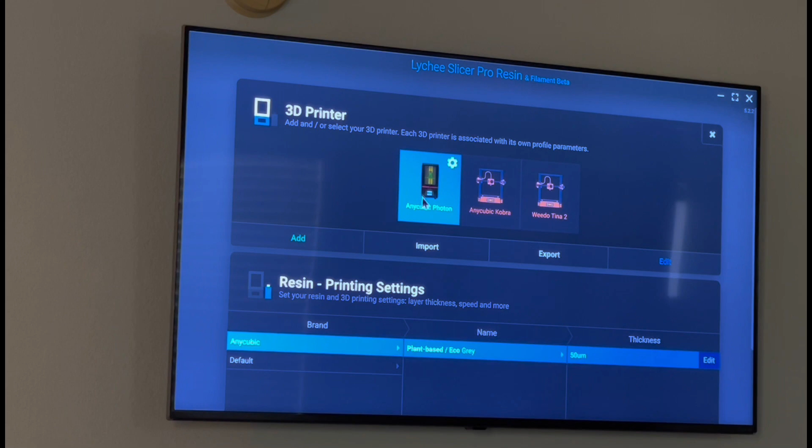And then so I'll save them, or I did save them. And then I'm gonna go to my slicer, which I use a Lychee Slicer Pro, which I have my resin printer here, my Anycubic Kobra, and then George's printer. I was trying to mess around with his settings, but anyway.

So I'll select my printer, go over here to add file, go to resin. I have them in wheels because I have a bunch of different sets of wheels. And then let's see, front dish.

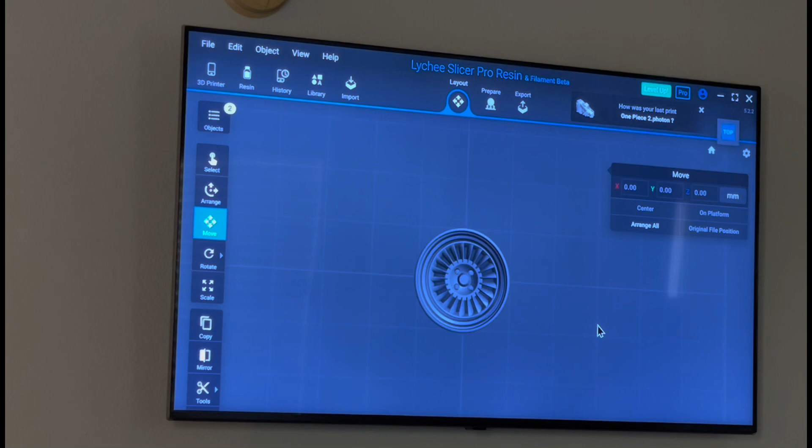So it pops up. These are a two-piece design. So here's the hoop, and I can go over here, import the spokes. See, it actually went ahead and just put it inside for me, which would be hard to do that for every single one.

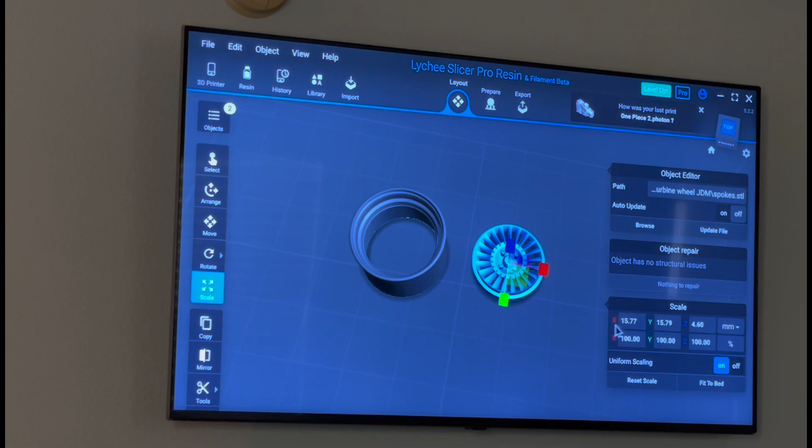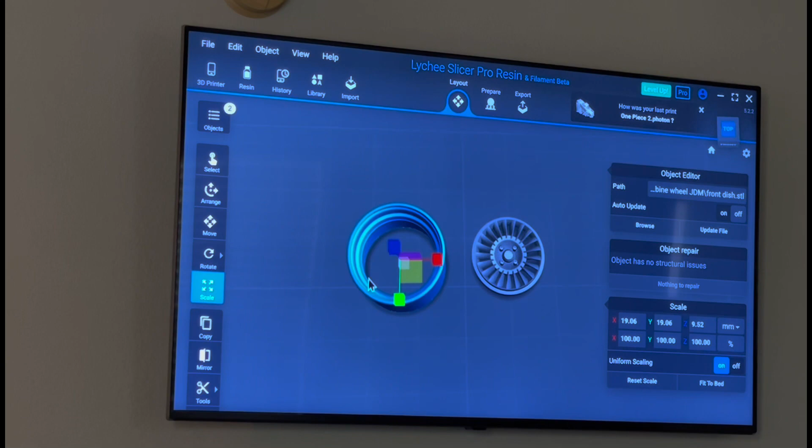But anyway, so two-piece design, and I can move them, obviously. And then what I need to do is scale these, because right now they're actually almost pretty good. No, they're not. Okay, so these are 19.06 millimeters, and I need to go down to like a 15.

I think it's like a 15.8 or something like that on there. So I need to scale these two proportionally to each other. So what I'll do is I'm going to highlight uniform scaling so it does everything.

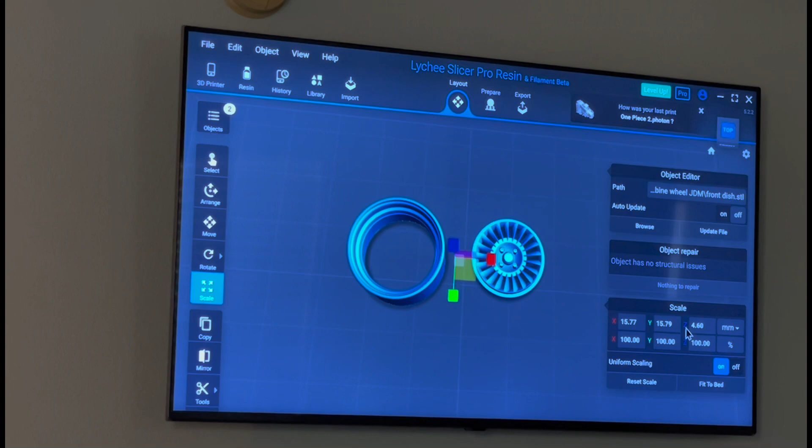And I need to find out what my wheels are really quickly here. I'll be right back. All right, so it's going to be 16 millimeters by 8 is what I need.

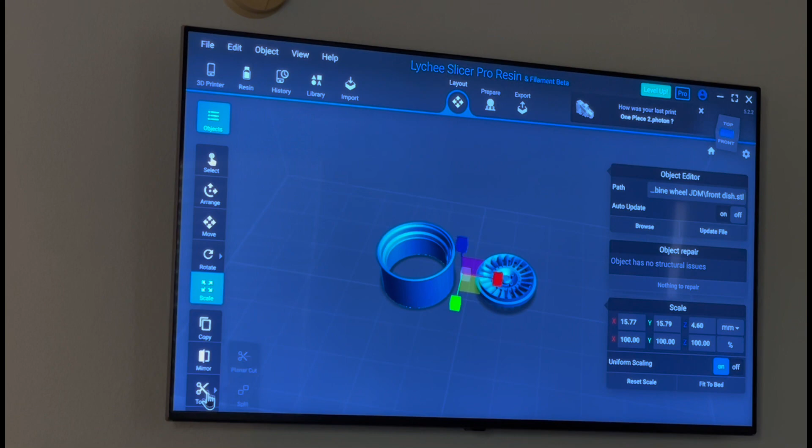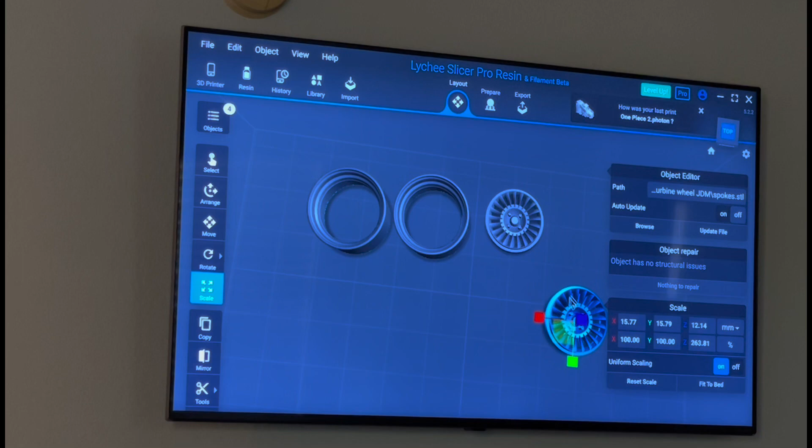So what do I have? A front dish. So what I need to do here, I want to copy, duplicate selection. I don't need that right now. So these are fronts. Oops, I just scaled that and I didn't mean to. I need to hit move.

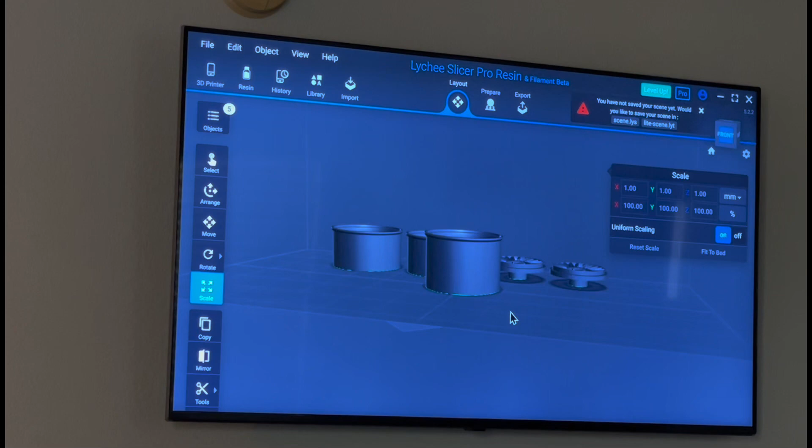All right, so anyway, so what I need to do now is I need to add the rear dish. You can see it's actually wider, but I can't, they're all going to have to be the same size. Which they almost look like this dish, and this dish is the same, how deep they're going to be.

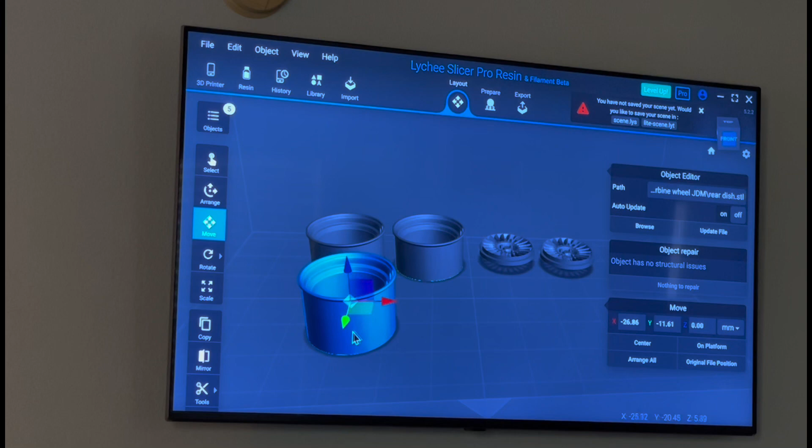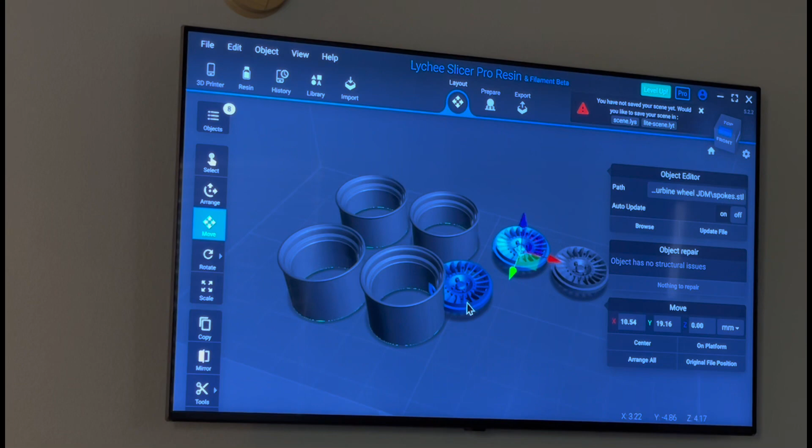But anyway, so what I need to do is I need to take this one and move it because I need to copy it and make another one. So now I have 2 hoops. Actually, I need to go ahead and copy this. I need 2. So there we go, I got my 4 hoops and my 4 spokes.

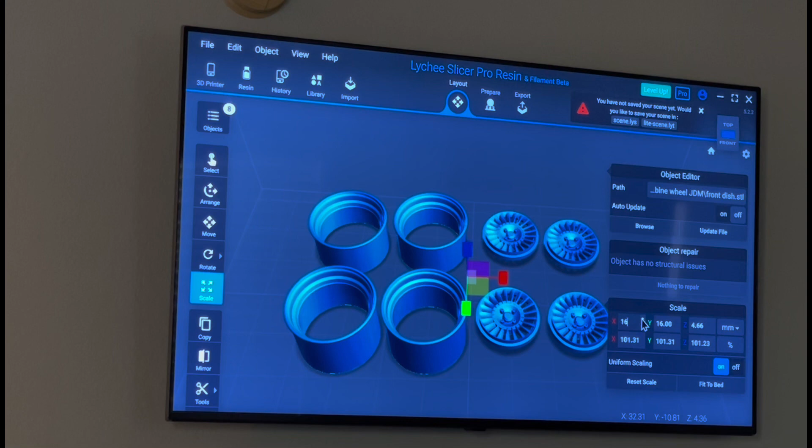And what I want to do is I'm going to highlight all. Scale. And then I need everything to be 16. Oops, uniform scaling. Oh, I see what it's doing. Those are different, so it needs to be 16 as far as the hoop size.

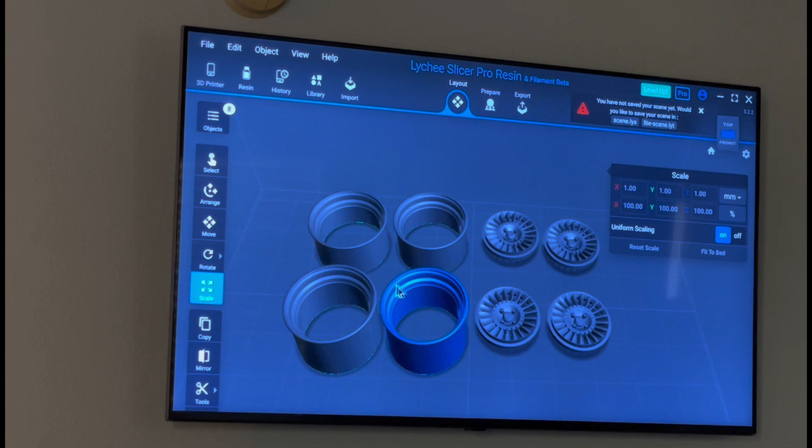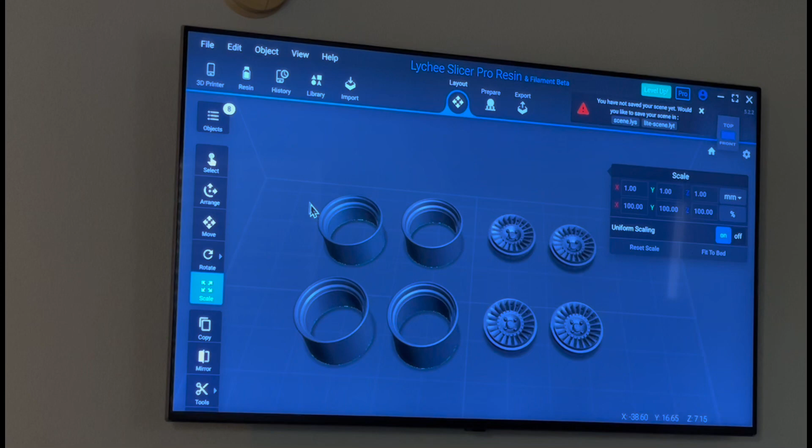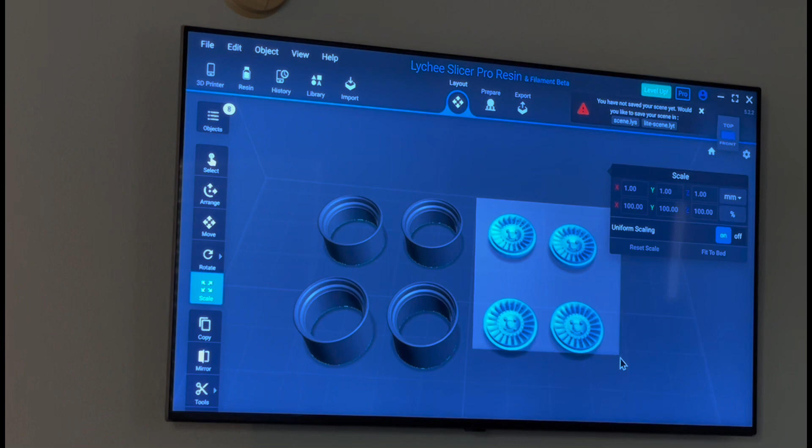And then I need to take the depth, or would be the width of the wheel, down. All right, so I figured it out. I needed these hoops to be 16 millimeter, so by scaling these down, these needed to go down with it. But every time I highlighted both, it only gave me the options for these. So what I did was I found the percentage to change this hoop to 16 millimeters, which was 83.95%. So then I come over here and I changed the percentage to 83.95%, which scaled these to match these.

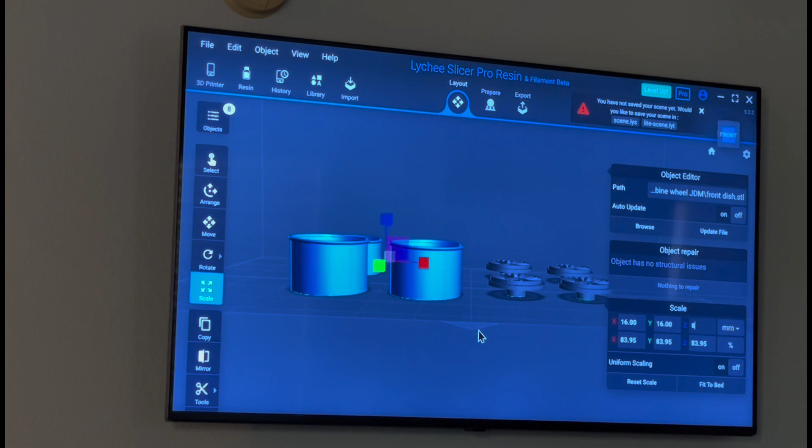So the only thing that I have left to do is I need to change the width. So what I'll do with that is I'll turn off the uniform scaling because it won't matter at this point. And so my Z-axis here, which is the blue up and down, I need to change that to the 8 millimeters. Boom. Which it only made these 8 millimeters. See, it doesn't do both. You would think it would change both, but of course it doesn't. 8 millimeters, okay, there we go.

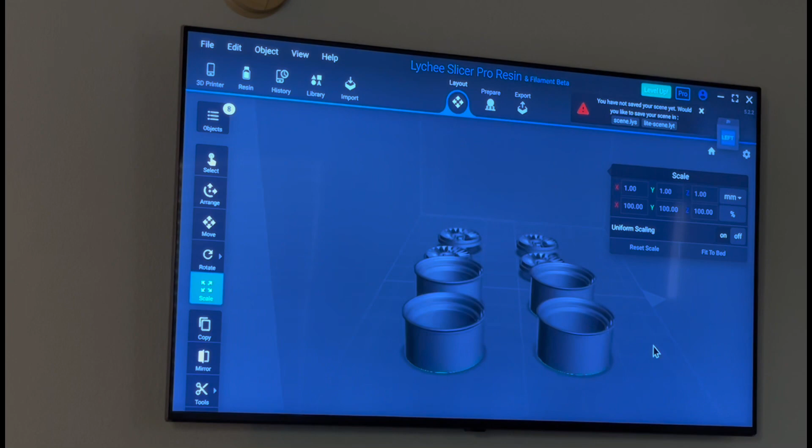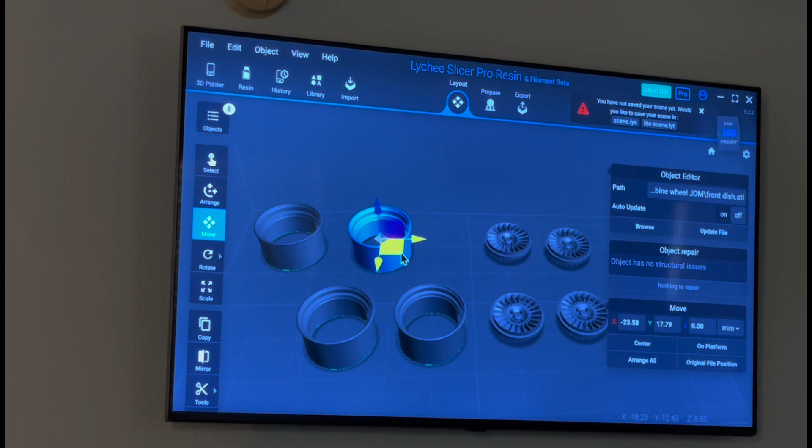I'm kind of wondering if these hoops aren't the same as far as where the spokes fit inside. But anyway, there's that. So what I'm going to do next is I need to arrange this stuff on my build plate. So this is my build plate here, simulating my 3D printer. And I'm going to move this stuff over in a spot, I'll need a little bit of room, because there's going to be supports that get added.

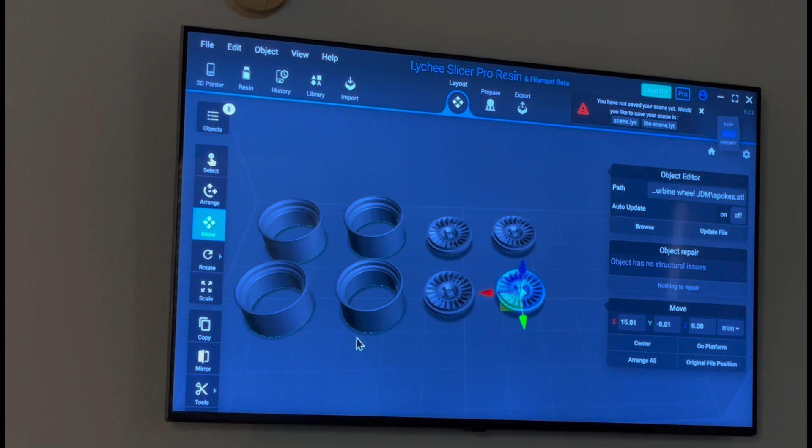So in order for these to print right, or print good, with the most detail and be smooth, I need to rotate these and put these on a 30-degree angle. So we got 36, I'll go over here and click down to 30. And the reason why I angle them this way instead of maybe putting this side down is so when you

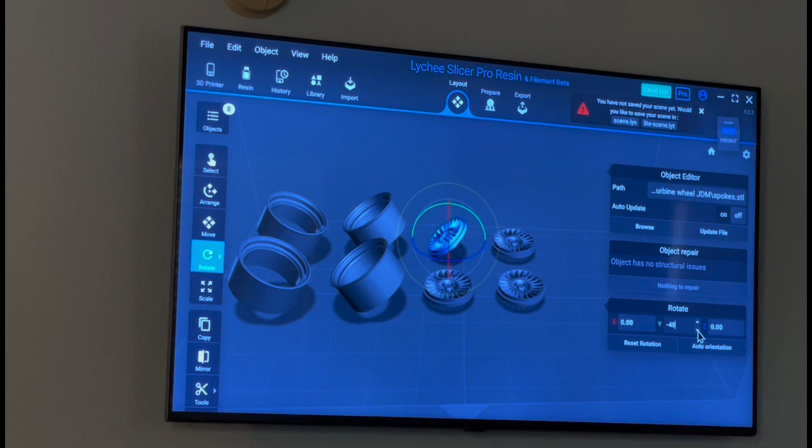print supports, which I'll show you in a second, the supports leave spots, which you'll sand it down and whatnot, but you don't want to have to sand down the part that has all the detail, because you might sand away detail.

So there we go, 30 degrees. Oops, we've done this better. And it doesn't matter which way. There we go. Oh shit, I just reset that. Hit the reset.

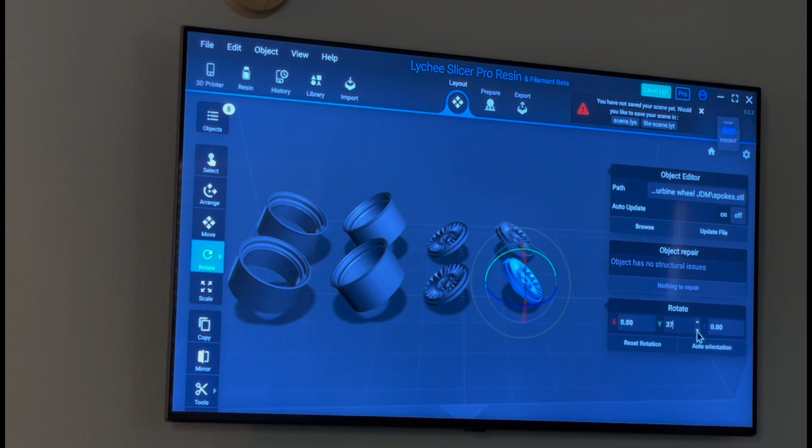Boom, there we go. So now we have everything set at an angle. And then what we're going to do is come over here to prepare.

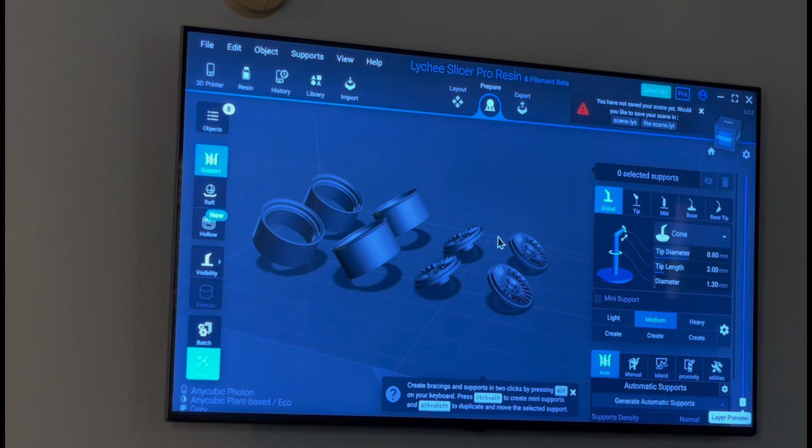I'm going to use medium supports because this stuff's not heavy. It's not like if I was doing a body, I would want heavy supports, especially at the bottom where it's printing, where everything's going to rest on. But just for these little wheels, medium supports. I could probably get away with light, but I don't want to have to worry about cleaning stuff up.

So anyway, I'm going to come over here and highlight, and I'm going to hit generate supports. It's going to do its deal.

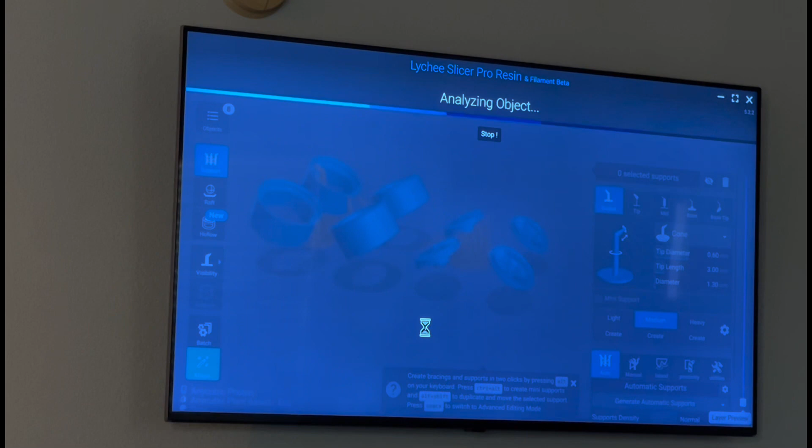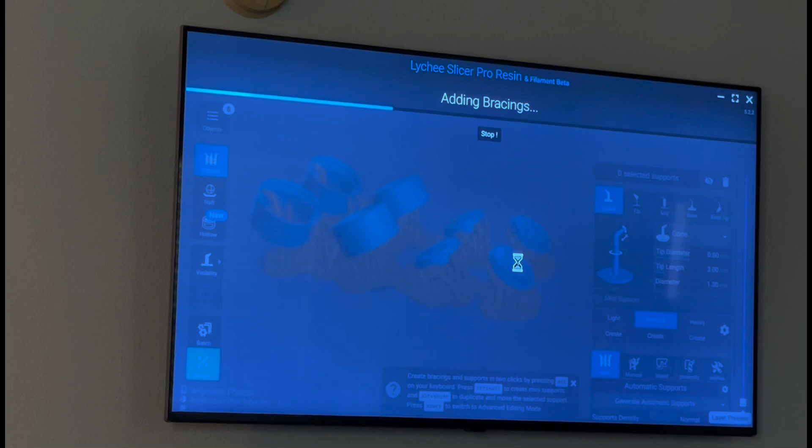Adding all that stuff. I don't know if you can see it popping up. It says 128 supports were added, 6 supports were not placed due to not finding a place to go, which is not a big deal. 32 island supports added, 33 supports optimized, 148 braces added total.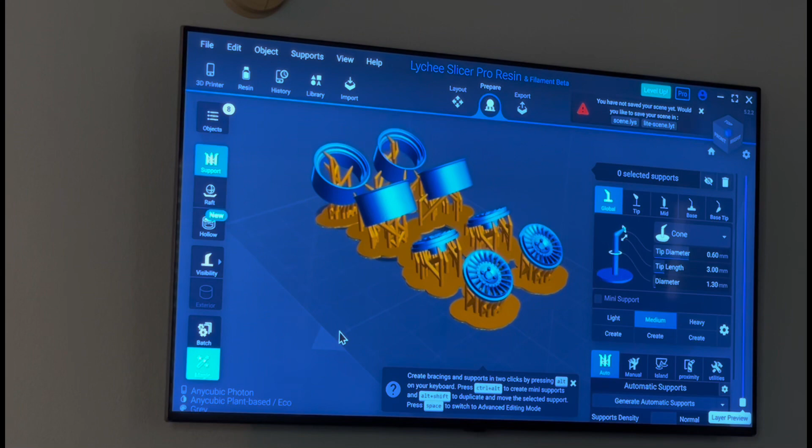So there you can see the supports. The rafts is what you see here, these round deals for the supports to connect to. So that is that.

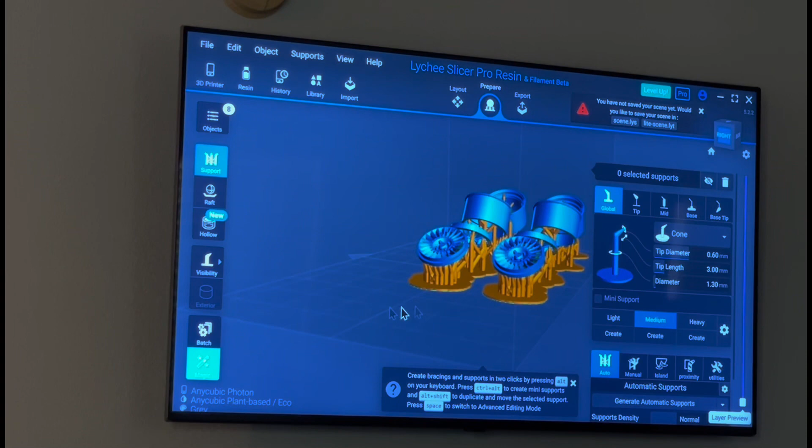Looks pretty good. There's some stuff I really don't care for, but I understand why it's there. Like these supports here, I don't really like them, but I'm not sure if I really have to have them.

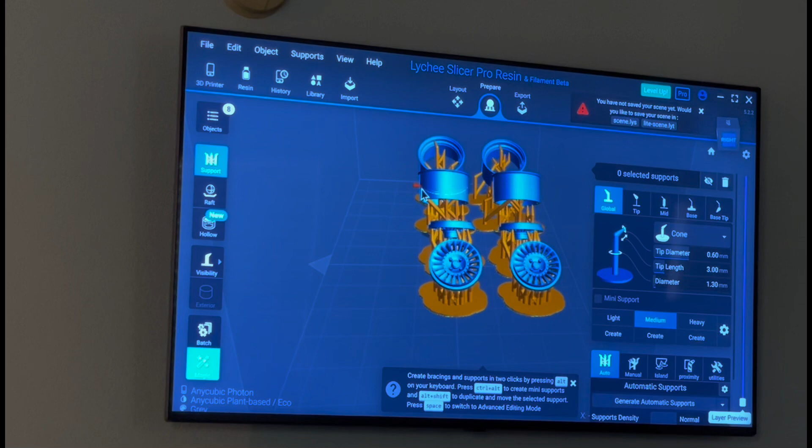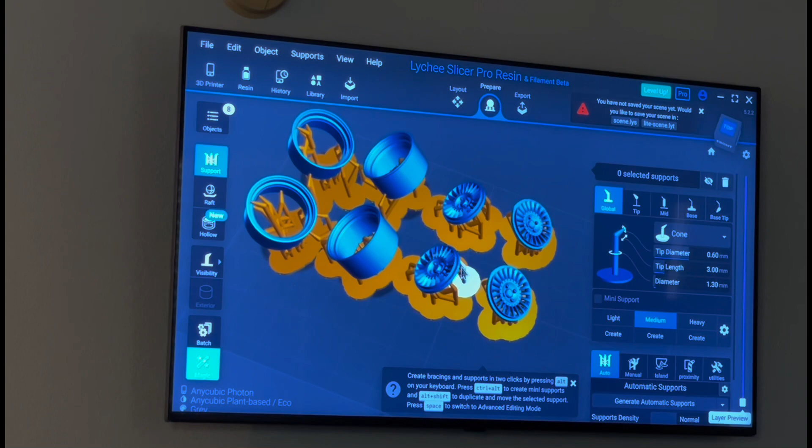But better safe than sorry, because cleaning up resin and it being stuck to your FEP, your clear film that's in there, cleaning up just sucks. When everything works right, it's good. So I know that this right here is going to print just fine.

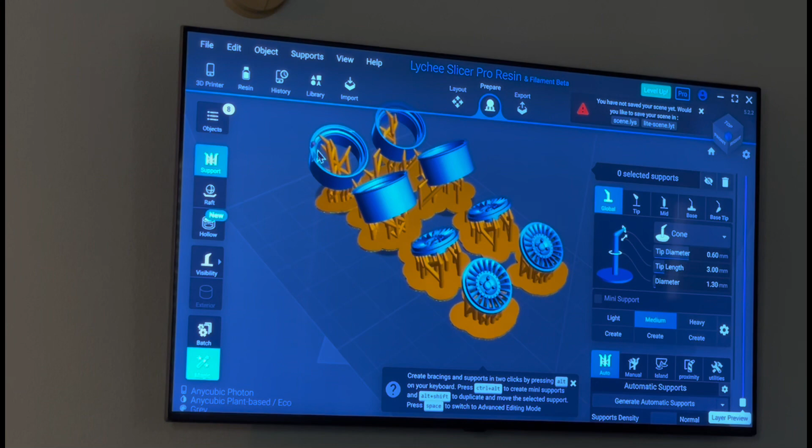So it's just a little extra cleanup when it's in the spot that you're going to see. You see like these, it's printed on the back side. And the supports here, this is where you want most of the supports, on the back side, because you're not going to see the back side. So you clean it up real good and everything's fine.

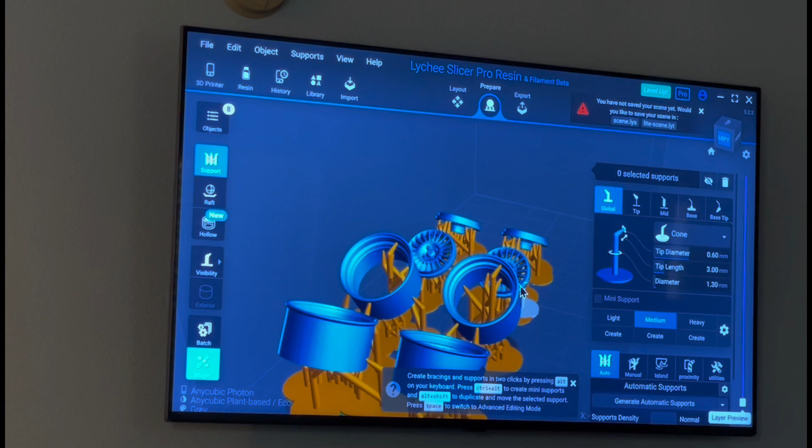But if you were to do it right here on this face, have supports, then that's going to be a lot of cleanup to make it look like it's supposed to. Perfect. And so it's just a pain in the butt. These few little spots won't be a big deal, but to have all these supports on the face, it sucks.

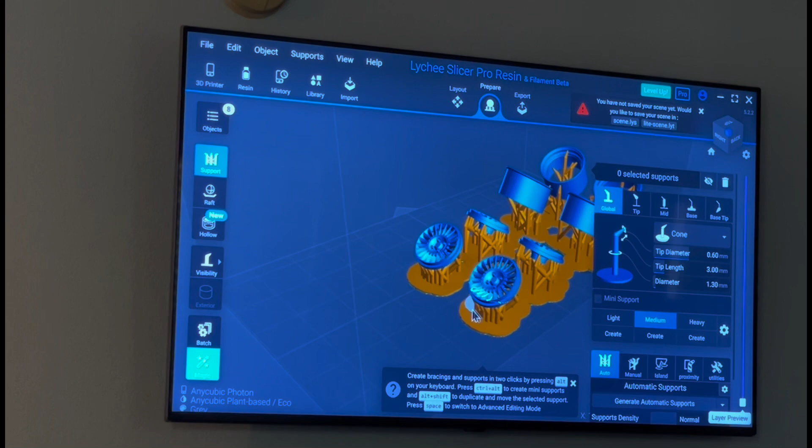So anyway, I'm going to go ahead. What I'm going to do, I want to see how it turns out. I want to print these in the same diameter as these, so I want these to be 16 millimeter. And I want to see how they look just being inserted in the H&R wheels without having to have these hoops, because then I can place these wherever I want and drop a couple drops of glue and I wouldn't have to worry about these hoops.

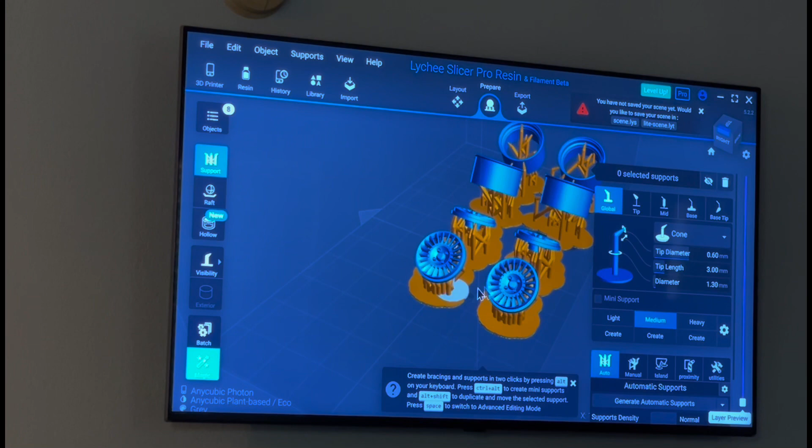So I'm going to go ahead and do 4 more of these at 16 millimeters. So I have all my wheels extra set.

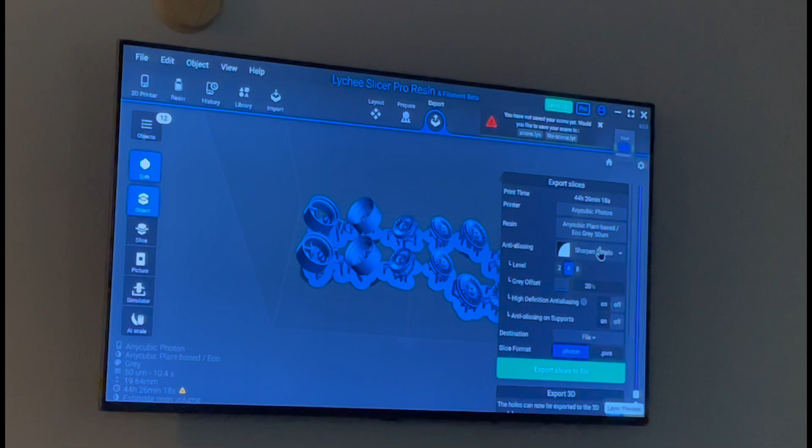And then I'm going to go to export, and for the anti-aliasing I'm going to do sharpen details. I want to put my level to 4. And then I'm going to export files and save it to my USB drive to go to my printer. And then we will go down and I'll show you the printer starting.

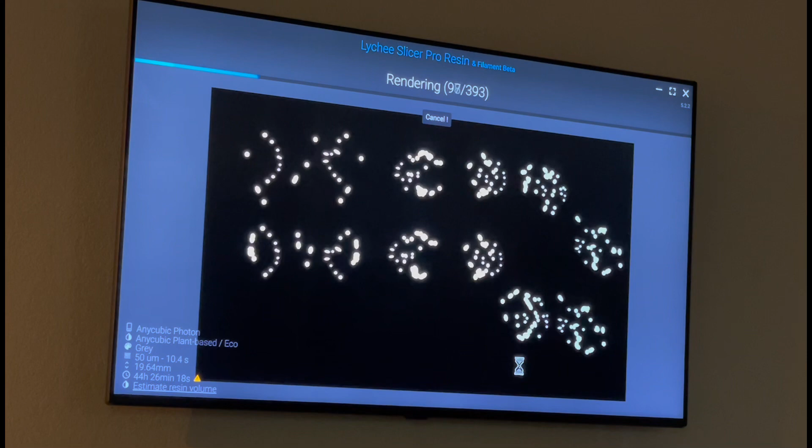Now right here is actually going to show how it's actually printing. It's going to go through all those layers just like that.

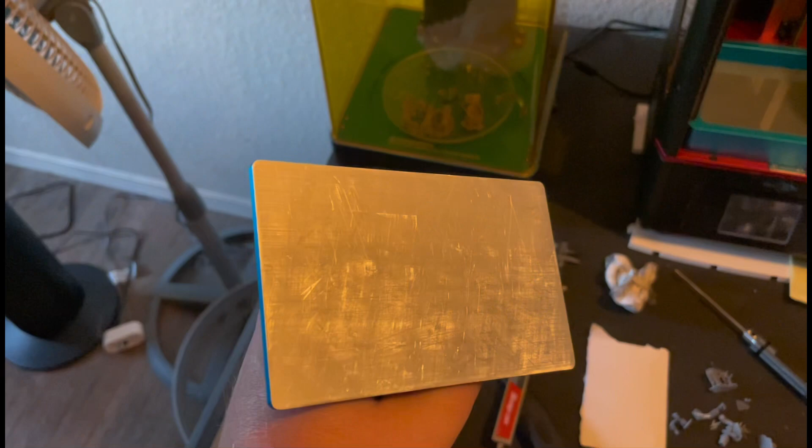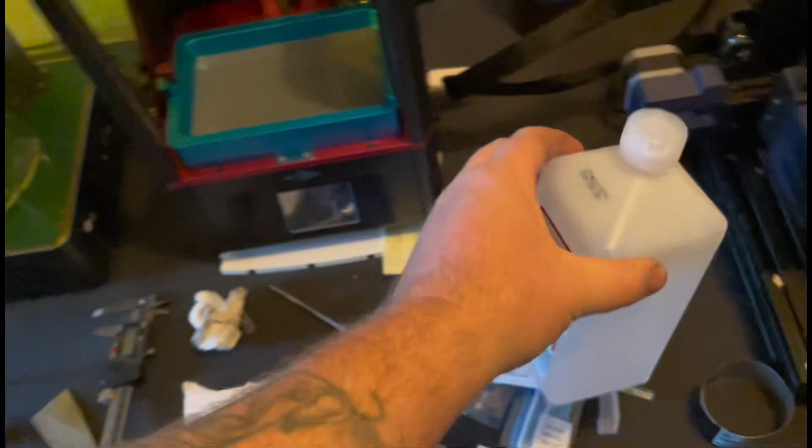So here's my build plate. I just wiped it off with some alcohol. This is 91%. Used a microfiber cloth. You can see where it's kind of scratched from trying to get some of the prints and stuff off, which doesn't affect anything. And it's got scuffs and stuff on it because I've taken sandpaper to it to make sure stuff will stick. It's all normal stuff.

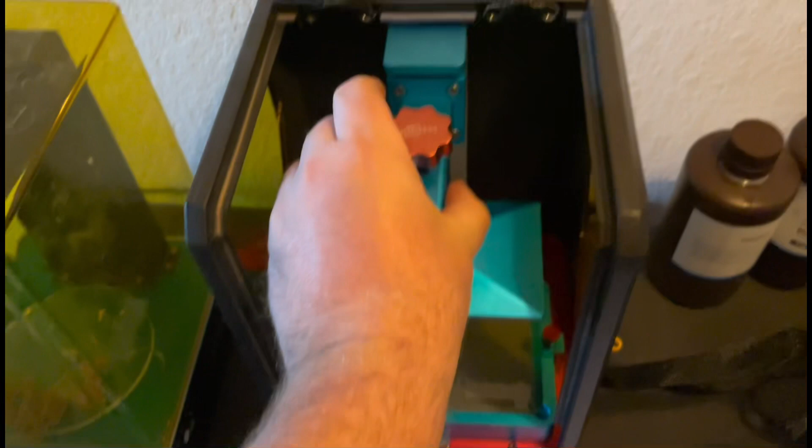Everybody's looks like this. But anyway, so we'll take it, put it on the printer, tighten it down, turn the printer on.

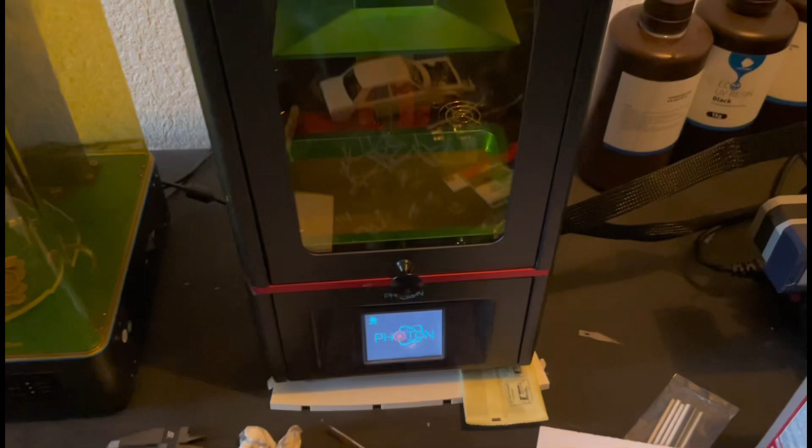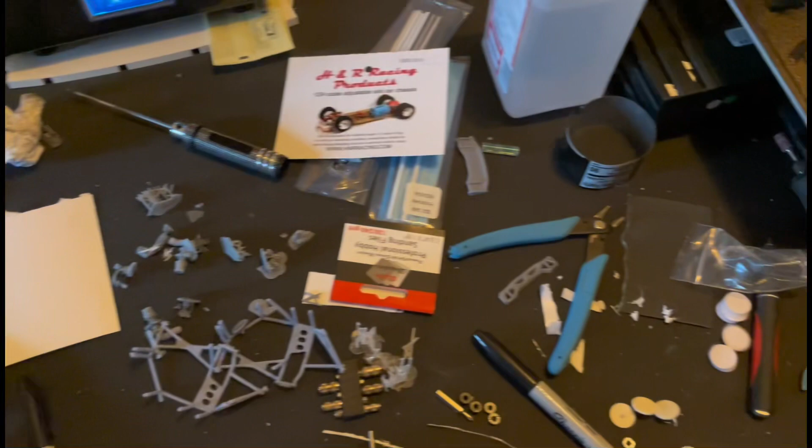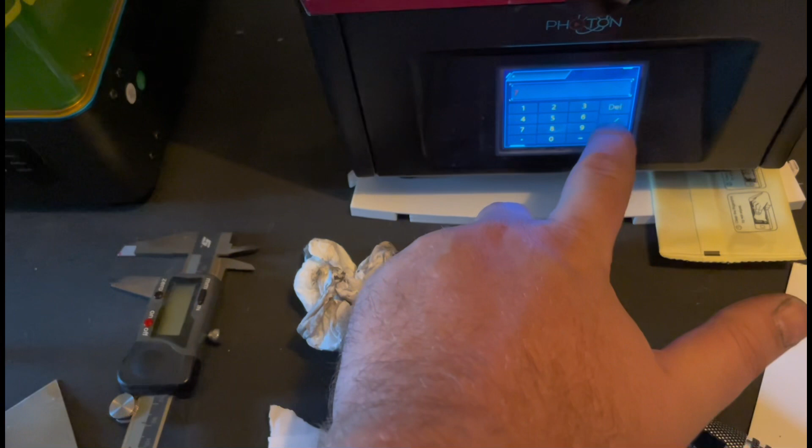Lots of stuff going on here. We're waiting on that thing to boot up. Let's see, okay, so I'm gonna go to Tools. This resets every time, change it back to 7. Enter. Oops. Yeah, I saved it.

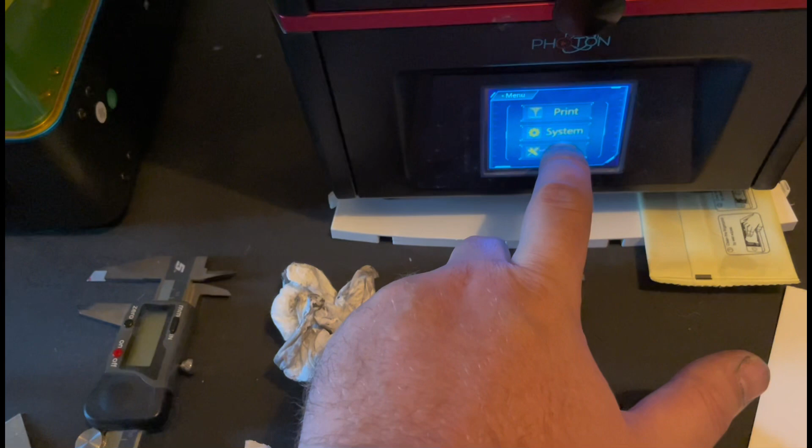Okay. What I always do, I want to go ahead and home it. It homes it automatically, but I like to get the air out from underneath, make sure there's no bubbles that get caught up. When it homes, it pushes that resin and the resin rises. So I always do this.

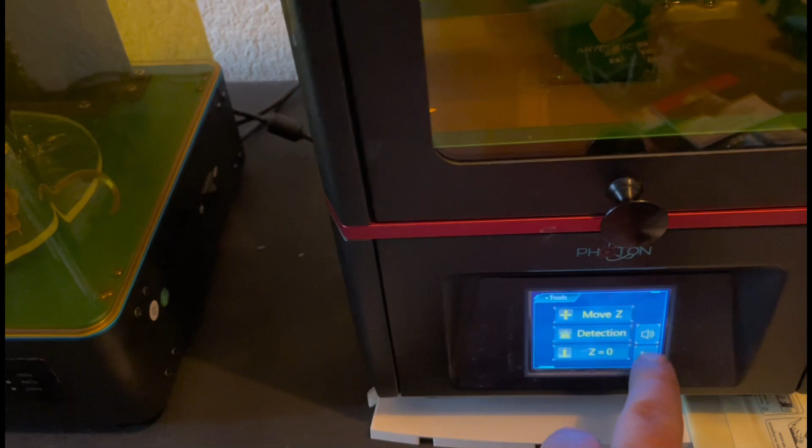It takes it a few seconds. Yep, see there's some bubbles. And then we're good. So then I come over here to print.

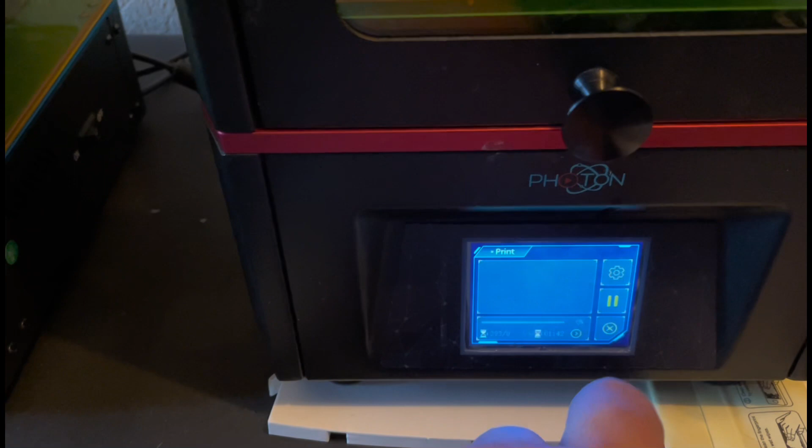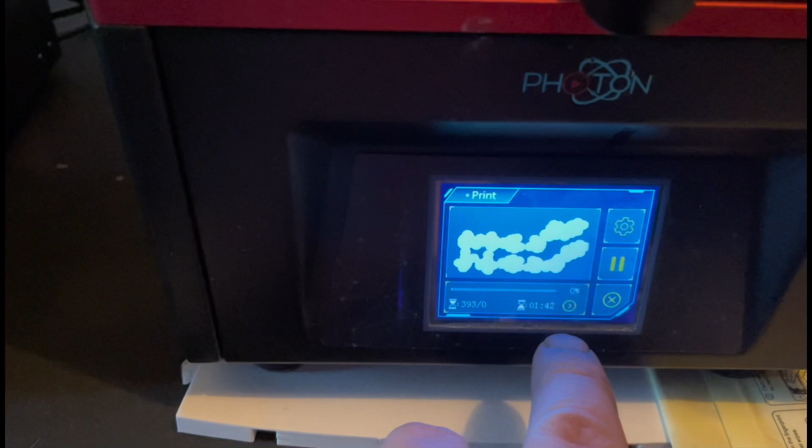And then I'll find my file that I saved where it says dish spokes, and I'll hit play, and there it goes. It's estimating that it'll take, it has 393 layers, and it's going to take 1 hour and 42 minutes. So that's how that goes.